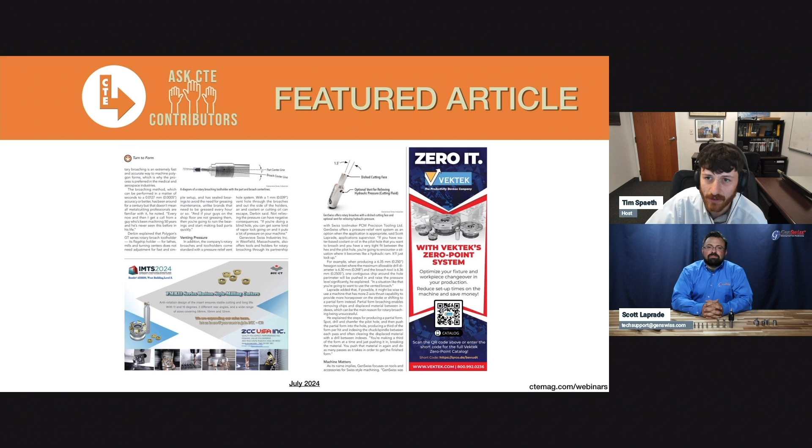Today's webinar is called Master the Art of Rotary Broaching: Revolutionizing Polygon Machining, based off the Turn to Form article in our July 2024 issue of Cutting Tool Engineering magazine.

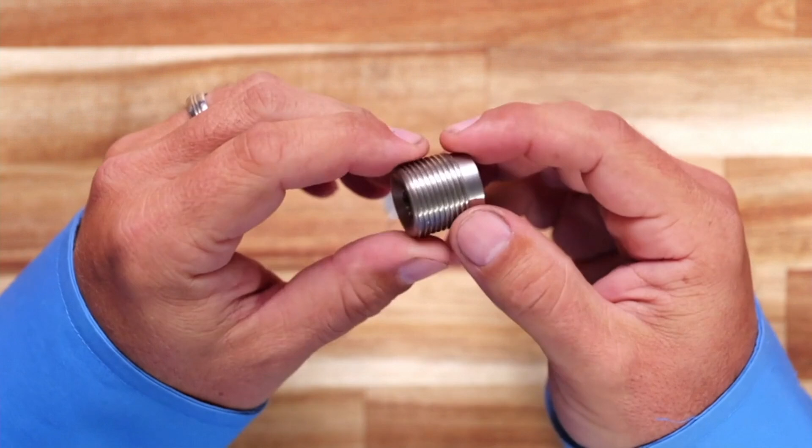Some good examples of parts you might be looking at doing are, for example, a socket in the end of a threaded plug. This is a part that one of my end users has made over the years, and I took it from my trophy case of successful broaching operations.

Another good example here is a small electronics housing that has a Torx drive in the end of it. I'll hold this up close so everybody can see.

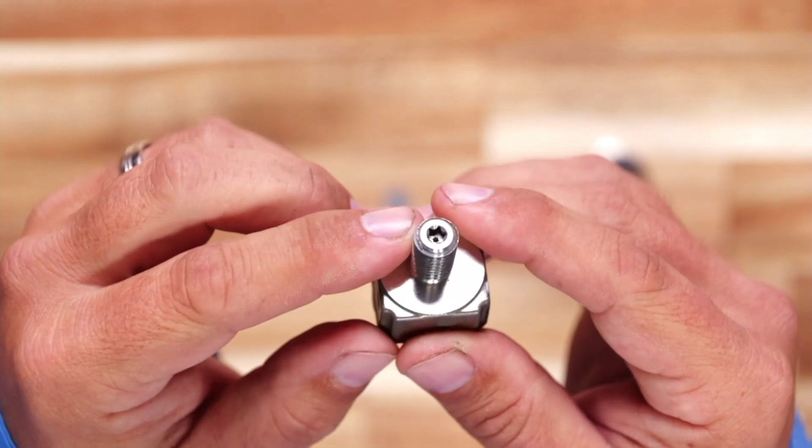One thing we're going to get into is the chip displacement, or material displacement, that broaching produces, because that's something we need to be very cognizant of when working on this type of product and doing this kind of procedure on our machines. But here's another good example.

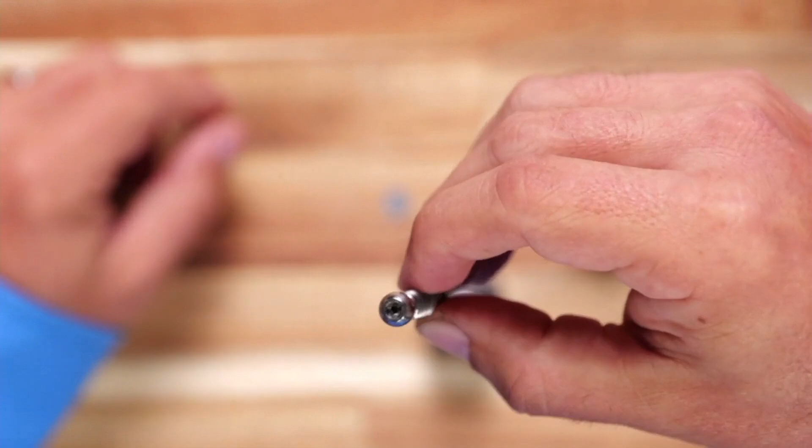Then the one that's one of my favorites, and where we see a lot of usage in rotary broaching, is the medical field. I've got a titanium bone screw here with a very tight tolerance hexagonal drive on the end of it. Again, this is one that was run at one of our users, where we were doing some processing and developing improvements for them.

We left the chip inside the bore prior to drilling it out. We were doing a whole bunch of different ways of chip removal, and this just happened to be one of the pieces I collected. But this is another very good example of an application you might encounter, or something you could apply this type of process to.

So who can use it? I did mention that already—anybody who's running CNC Swiss style lathes. You could also do it on manual machines, like a manual lathe or a manual mill. I've personally been able to successfully rotary broach on a Bridgeport, for example. As long as something is rotating, you can make it work.

On a lathe, your part is going to be rotating, but on a milling center, the part will be stationary in the vise, and your broaching tool comes down in the spindle and engages the workpiece, with the holder rotating while the tool engages and becomes stationary. You're still going to get the wobbling action that gives you the cutting. We'll get into how that actually physically functions in a few minutes, because I think that's a little bit of the secret sauce to understanding how this process works, and it'll make you more successful and better at troubleshooting it in your own shop.

So the basic concept of how rotary broaching works is you've got two things. You've got a pilot hole on the workpiece that you've already pre-drilled and chamfered. You're going to have a broaching tool, a cutting tool that's the size of the profile you're looking to machine, and then you're going to have a holder that tilts that cutting tool at 1 degree relative to the workpiece, but also on center line of the workpiece.

That's the most important part right there. You need to have that broaching tool aligned to center line as best as you possibly can on the equipment you're working with. The 1 degree gives it its cutting action, so you can think of the broaching tool as a chisel that will scallop its way into the workpiece as it rotates.

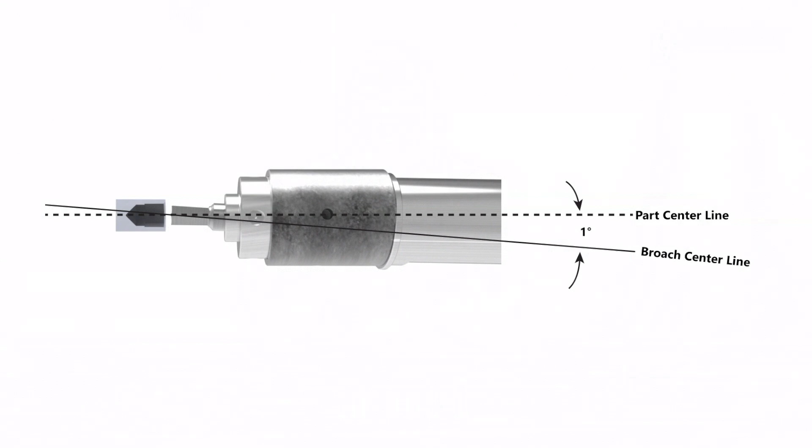A good visual way of picturing how that works is imagine a cookie cutter. You'd have a handle on it with a shape, and you push that into the dough you're going to be shaping. That's the same kind of motion that this broaching holder generates when it engages the workpiece. Each corner of the form gets a chance to be in the pressure zone, and it slowly scallops its way into the pre-drilled pilot hole. And it's as simple as that.

Because it's working in this manner, having your center line aligned between your broaching tool and your workpiece is critical, because if you're off center in any way, you're going to have more pressure loaded up on one side than another, and it's going to give you a form that's unacceptable. Your tool life won't be where it needs to be in terms of having a reliable and stable process for producing pieces. So those are things to keep in mind - your setup is going to be really important. You're going to make sure that everything's on center. That's very, very important.

Another thing I always like to get into is that the Swiss style holder relies on precision gauge length tools. You can see in front of me, excluding these two, these are all tools designed for this particular holder. Even though we've got one here that's about 40 thousandths of an inch, and over here we've got a 3/8 square, they're all on the same overall length broaching shank. So when you put it into that broach holder, it's at a predetermined set length to put your center line of the broaching tool in the center line of the shank on the back of the holder. It's all reliant on that to make sure your center positioning is good.

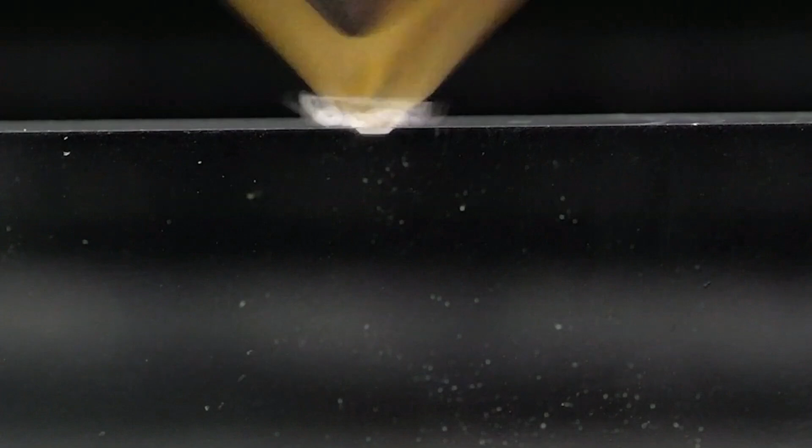The next piece we want to go into - we've got a really good demo video that shows how your hole prep would go, as well as the actual cutting action. This is something we ran in a vertical machining center using polyacrylic. The really cool thing about it is you get to see the cut from the side through the material as it's happening.

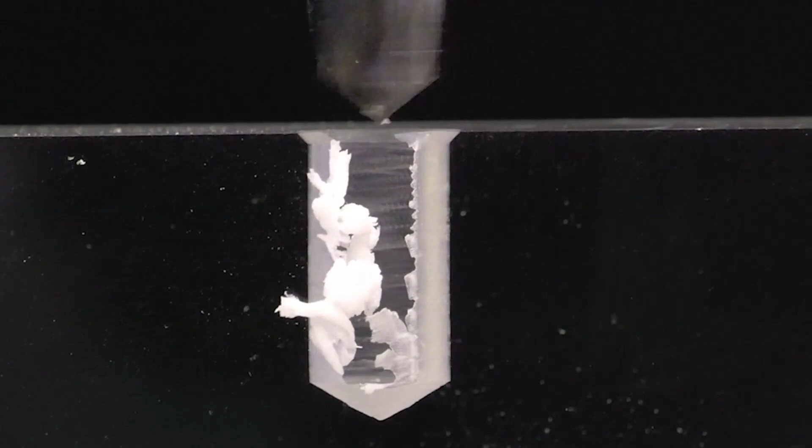The first step of the process when you want to run this kind of product is you want to make a nice stable pilot hole or a spot for it. Then you're going to drill it out to your diameter of your flat to flats, a little bit oversized - about 1% oversized is the goal. You want to have a little bit of clearance on each flat, so you're generating 6 individual chips. We always recommend boring if you can, because then you can really control the size of the hole prior to broaching.

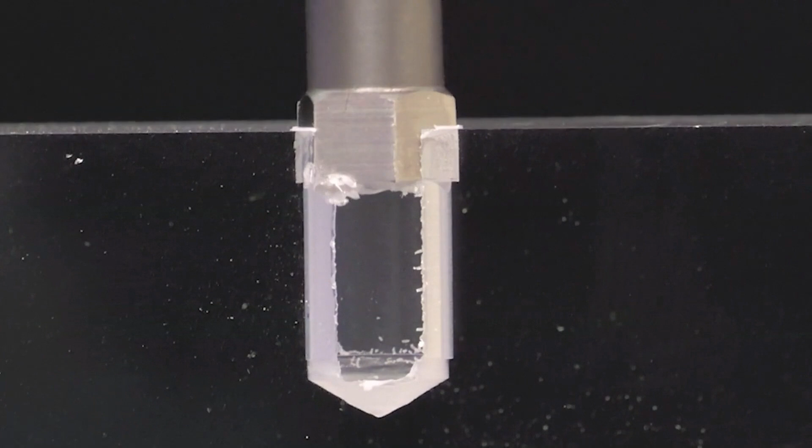Then you're going to bring your broaching tool in contact with the workpiece. Keep in mind, this is in a vertical mill, so the tool's not moving, the holder is moving, but it's still giving you that oscillation, that wobbling, that cutting action that generates the flowing chip in front of the form. You can see here that one of the things we have to do is leave a little bit of clearance at the bottom of that bore for chip accumulation.

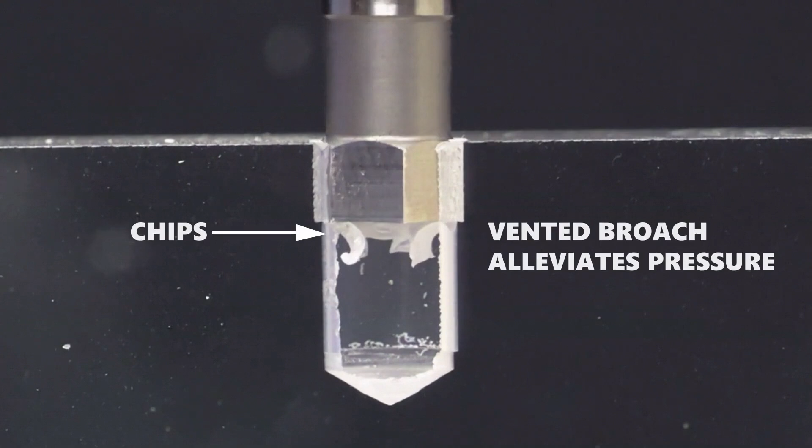That's probably one of the biggest drawbacks of rotary broaching. You need to have room for that chip. It's not going to evacuate in the same way that a helix would on a drill. Those chips are going to push forward. One analogy I always like to give is think about a bulldozer pushing a pile of dirt. Eventually that pile of dirt is going to pile up to the point where the bulldozer can no longer push it. It's the same thing with your machine tool when you're doing a rotary broach.

So you need to be kind of careful of that with your feeds on your broaching tools. You want to make sure you have just enough room in there for that material to accumulate without packing up to the point where it overloads the machine.

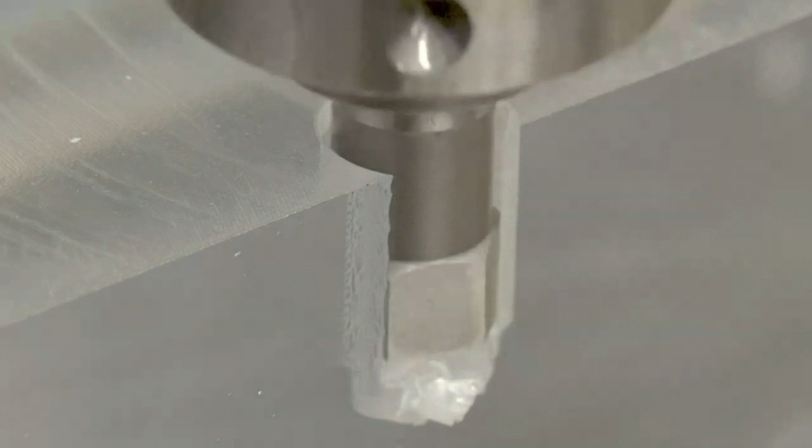Ways you can control that: leaving a little bit of additional space beyond the hex depth of cut, so that way you have some space for the chips. Other ways to control it is with your pilot hole. We showed in the video earlier that we used a boring bar. You could use the boring bar to really fine tune the diameter of the hole to find that good balance between hex size, pilot hole size, and chip size, so that way you can get to the depth of cut you're trying to achieve.

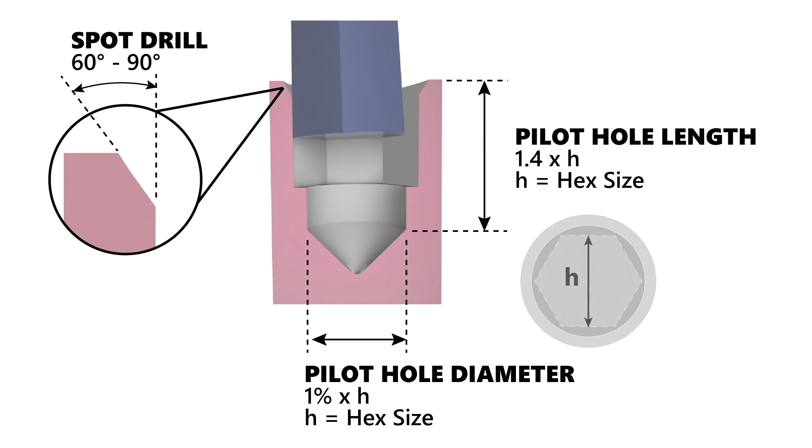On the screen now is a diagram showing an exaggerated orientation of the broach tool relative to the pilot hole. A good application for broaching is usually somewhere around 1.4 times the flat to flat diameter, that's kind of the sweet spot. You can go deeper than that, but it's really driven by material hardness and material cutting properties, as well as maximum pilot hole that's allowed. So, a bigger pilot hole will make a smaller chip, which means you can go deeper.

Up on the screen now is a very good example showing the hexagonal profile with the pre-drilled pilot hole exhibited by the dotted line. As you can see, it's really just kind of knocking out the corners instead of a full form, so you're getting smaller chips in a scenario like this. That's going to be your ideal rotary broaching scenario right there, and that's what you want to aim for.

In our catalog and on our website and all our support literature, we always say 1% is the rule of thumb for the pilot hole diameter. But my personal rule of thumb, if you've ever called me up and talked to me about rotary broaching, is how big of a pilot hole can you get away with and still get this part to pass QC? That's really what you want to be doing, because your tool life is going to be better, your process is going to be a whole lot more stable, and you're going to have a much easier time running it, where you don't have to worry about the chips giving you issues with tool pressure or evacuation. Removing them after the fact with a drill is key, and they're much easier to remove when they're small.

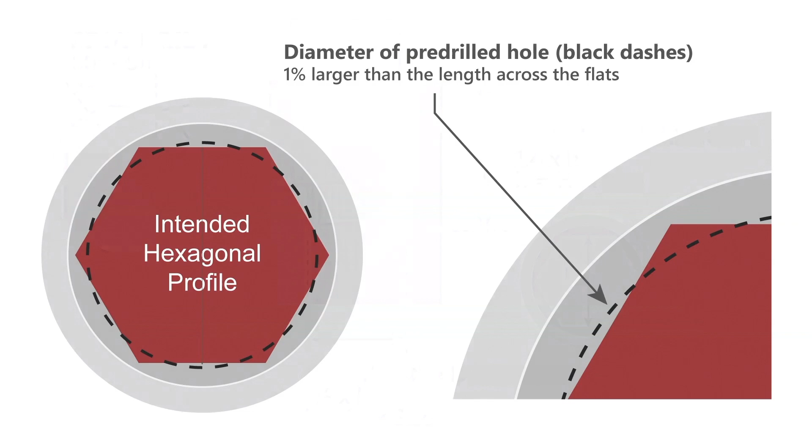So again, we're talking about good and bad applications here, and what you got to watch out for. Like I said, a good application is somewhere around 1.5 times D, with enough room beyond the hex form for chip accumulation. So you want to watch out for that kind of stuff.

There's also limitations on shape. You definitely need to have a polygon shape that's regular and symmetrical, because it's being driven by the workpiece. And if you were doing something like, I get a lot of calls about keyways, a lot of people want to rotary broach keyways. You can't rotary broach a keyway because it's an irregular form. It needs to be the same all the way around, like a hex or a square.

Hexalobes or Torx forms are also really good applications for it. But if it's something like a keyway where it's rectangular and you've got a long side and a short side, it's not going to be driven by the workpiece in a way that gives you good engagement between the workpiece and the broaching tool. You'll get some interesting things happening in that case. Plus, the chip load is going to be significant, and it's just generally something that should be avoided.

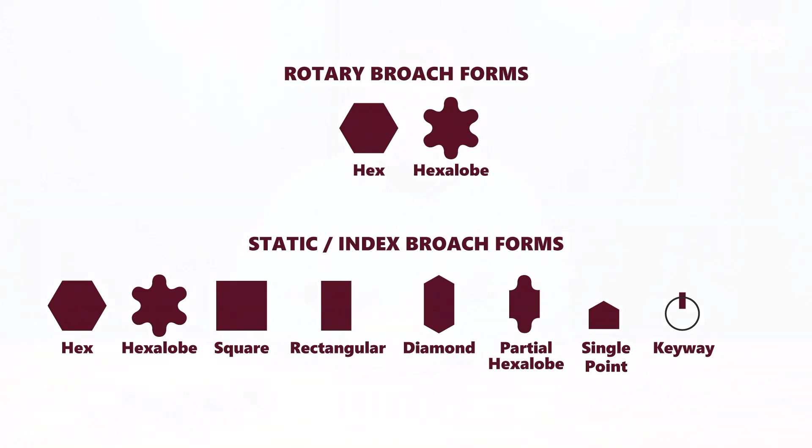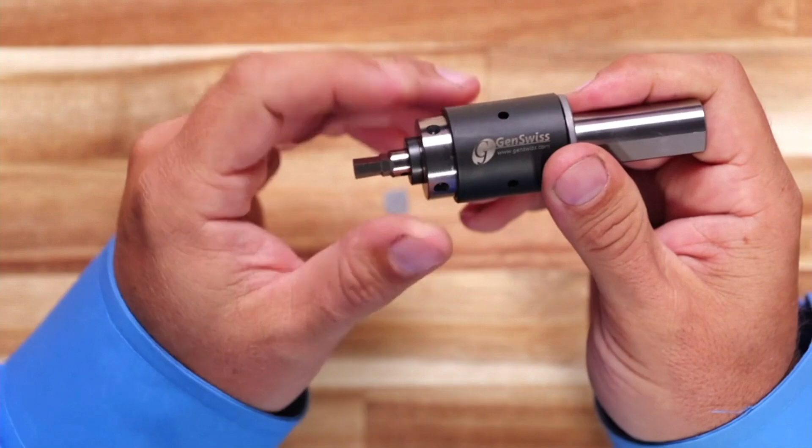There's also limitations on timing on a workpiece. So if you've got a workpiece that has a flat or a cross hole that needs to intersect with the shape that you're cutting into it, rotary broaching—you can see this is just a free spinning bearing in the holder—you can't really control where this lands. So if you've got a feature on the external of a workpiece that you have to align to one of these flats, or the hex needs to be oriented in a certain way, something like this is really difficult to make work.

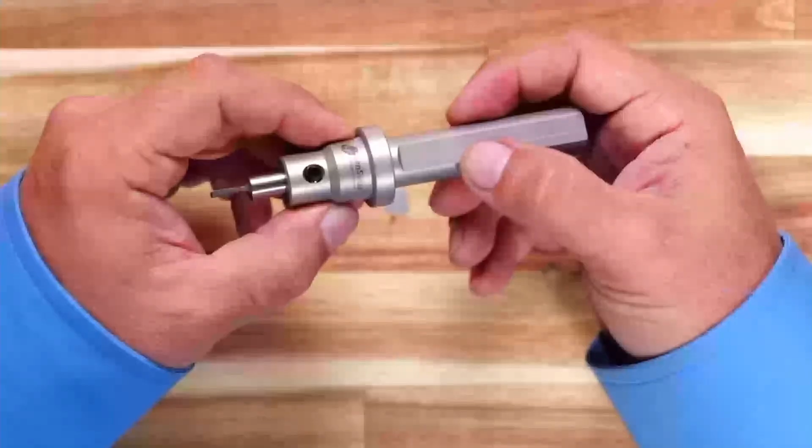That's where we step over to what we call index broaching or punch broaching, and that's where this tool steps in. As an example, I've got on the end here a rectangular form broach. This can be used to generate a hex in 3 indexes by punching once, indexing, punching again, and indexing a third time and punching it again to make a final form. It also gives you the opportunity to clear chip in between each of those hexes.

The chip is always going to be your enemy—that's the thing you're working against. This gives you a little bit more control over it. It's not going to be as fast as a rotary broach. A rotary broach, you're looking at 5 seconds at most to generate the form, whereas something like this, depending on how many indexes you have to do, adds some cycle time. But oftentimes people are doing this on the subspindle side of a Swiss machine after the rest of the operations are completed, so it's free time in that case. A lot of times you'll have some time to do index broaching on a CNC Swiss machine.

This is really good for situations where you just don't have a good way of controlling chip and you need to remove it between those impacts or indexes, so it gives you a little more control. Plus you can time it, because we've got a flat on the broaching tool, a flat on the shank, and it's also timed to the positioning you're going to have it in the machine. So you'll know the orientation of the tool relative to the workpiece—you can clock it using your C-axis, for example, and that way you know exactly how it's oriented. But if you're doing something simple like a Torx, a hexalobe, or a hexagon on the end of a fastener, then orientation doesn't matter, and rotary broaching is a great way to apply that.

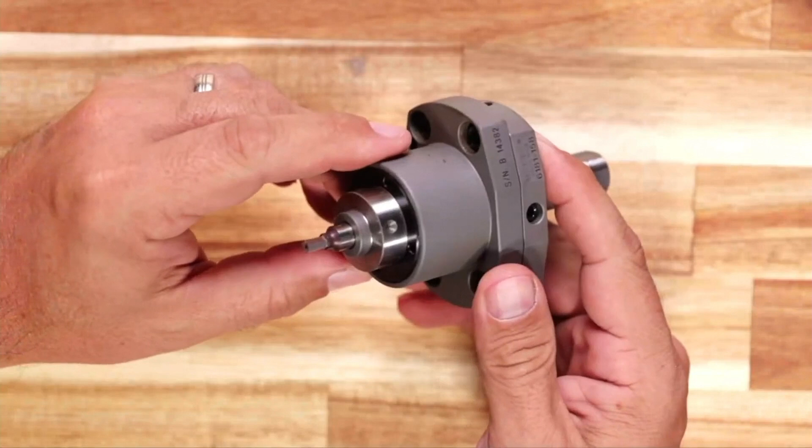This is beyond Swiss machining. This is kind of a more general purpose rotary broaching product, and it is more in line with the older types of equipment that was available out there to the market. So this is our heavy duty style CNC broaching holder. It uses the same series of broaches as our Swiss lineup, but it has a more robust bearing pack, and it's also center adjustable.

So if you're on a turret machine that only has X axis controllable from the control, you can use this to set it up. You can see on the flange here, we've got X and Y coordinate adjusting screws built into the shank. If you look at the two halves sandwiched together, very carefully, you can see that it's tilted

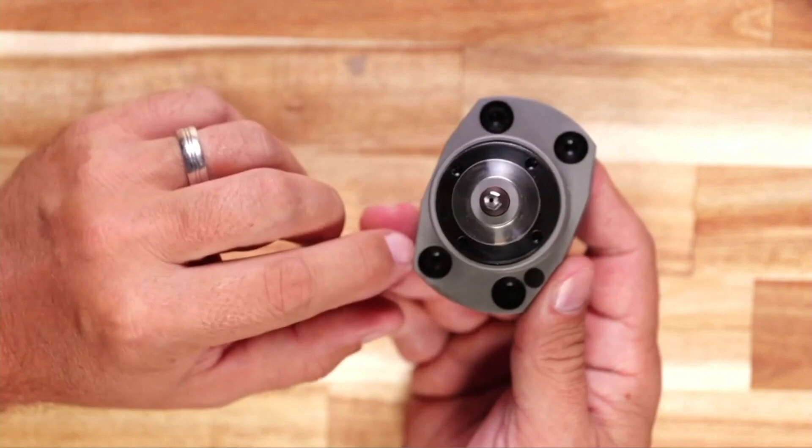at that requisite 1 degree angle to make the chiseling action work. And then you have the same free spinning bearing on the front and your adjustment bolts for loosening and tightening the two halves on the holder. So you would loosen the front of it and adjust your X and Y coordinates using the screws on the back side of it. You could put your indicator up on the broaching tool at the cutting tip, which is actually where you want to go.

Oftentimes I recommend people use a gauge pin instead of the broach itself, but measure out at the same distance as the broaching tool. That's where you want to sweep your broaching tool in. So as I'm showing here, you can use the indicator on your chuck and bring it in.

Another way that you can kind of cheat that, a less accurate way, is you can loosen the 4 screws on the front and make a setting plug that you can chuck into your lathe with a diameter already pre-drilled in it that's bigger than the point-to-point of the hex broach that you want to generate. And then you can bring over, manually jog your turret over and engage the 3-jaw chuck with the broaching tool in the holder,

and then center it and let it float itself into the setting plug that you've made. You can make this out of brass or aluminum, some scrap material you got laying around. And then once you have it in there, you're pretty close to center in that regard. And now you can lock the two halves together using the screws on the face. You should be close enough at that point to start generating sockets nice and reliably.

So this is what we generally recommend for machines that only have one axis of travel and are bigger than a Swiss style lathe. So it would be really good for Mazaks, Okumas, Nakamura, those kinds of pieces of equipment.

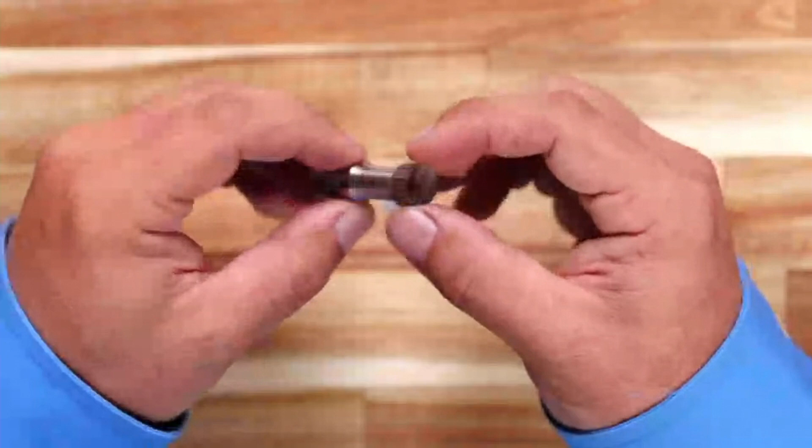And then if you get into something really specialty, like some of these spline broaches, we'd be able to turn around in a couple of weeks. Generally, something like this requires custom grinding, so there's a little bit more detail on a product like this, but it's also something we definitely have in our repertoire, and a lot of experience making sure our customers are successful when employing this type of product.

I think that covers just about everything I had that I wanted to go over here. We'll see if Tim's got any questions maybe from the audience.

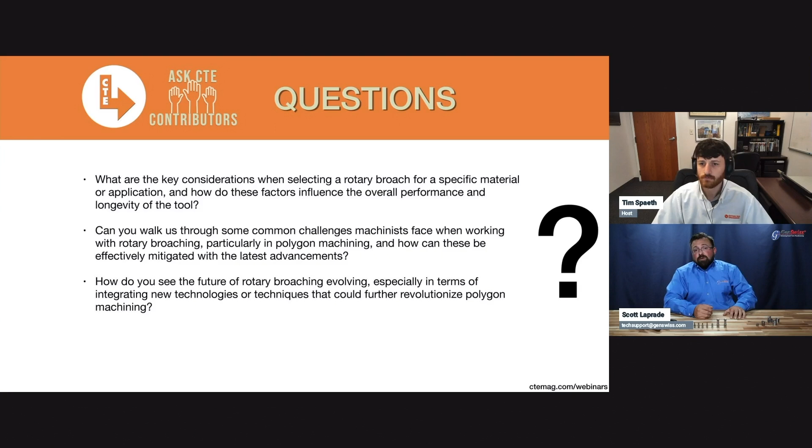Okay, so I think we did cover some of that earlier in the presentation. Key considerations are, first and foremost, how deep does that socket need to be machined? If it's really, really deep, then a rotary broach might not be the way to go, because you're limited by diameter versus depth, and then chip accumulation. Chip accumulation is also dictated by the material, so harder materials limit how deep you can go versus softer materials.

And then lastly, your pilot hole size is critical. If you can do a pilot hole that's a little bit oversized, then you can do a bit more in harder materials. But if you're trying to do a full form in some very hard material, that will affect performance, tool life between the bearings and the holder, as well as chipping out tools.

But another thing to keep in mind, here at GenSwiss we are a rebuilding facility for live tooling, and broaching holders is something our technicians really like doing because they're very simple and easy to work on. So we do have the capability of getting you up and running again quickly. That's very cool.

The second question that came in was, can you walk us through some common challenges machinists face when working with rotary broaching, particularly in polygon machining, and how can these be effectively mitigated with the latest advancements?

Okay, so that question right there is the answer right here. This is the holder that came out to solve that problem. One of the biggest common challenges was people would struggle to center the broaching tool. With the big adjustment style holders, that can be challenging to get set up in a timely manner, and sometimes people would get it close enough and just start running it. That's going to affect tool life and part quality. So this non-adjustment style holder was developed specifically to make that part easier.